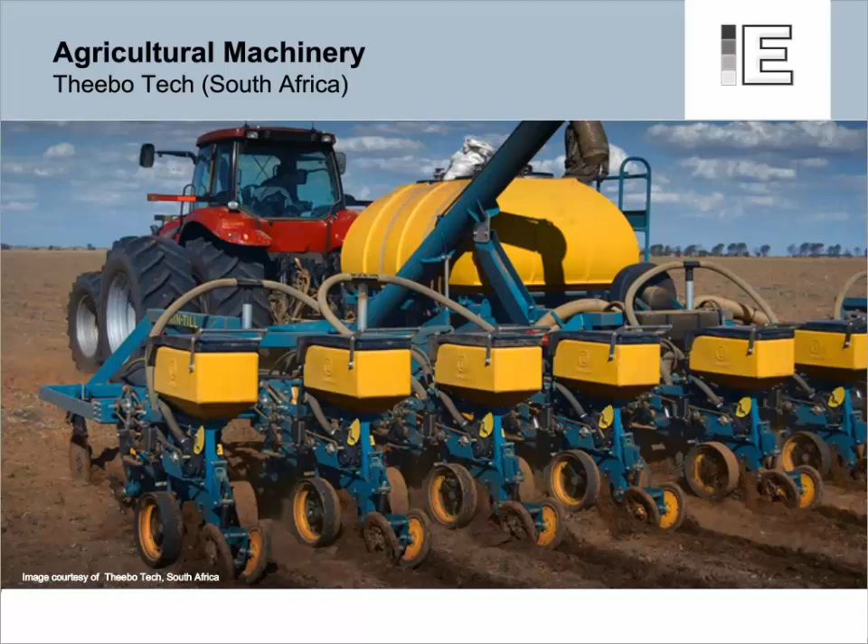Just like you and other agricultural machinery equipment manufacturers, including Theebo Tech, you design and build very complex machinery. These machines and projects are under a specific contract, and you have to deliver by a certain date. So what does that do to you? It puts product design on a very critical path for profitability.

If we take a look at the challenges that Theebo Tech faced, you can see them on the screen. They needed to streamline their entire process. They needed to select designs that could best manage sheet metal and large assemblies, and they also wanted to improve what they've already used and what they've already designed.

In order to maintain their leadership position, they were committed to finding a way to turn their challenges into opportunities. Theebo Tech took a deep look at their design, engineering process, and capabilities, and while they did that, they analyzed their strengths and their weaknesses. We'll come back to the Theebo Tech story in just a minute.

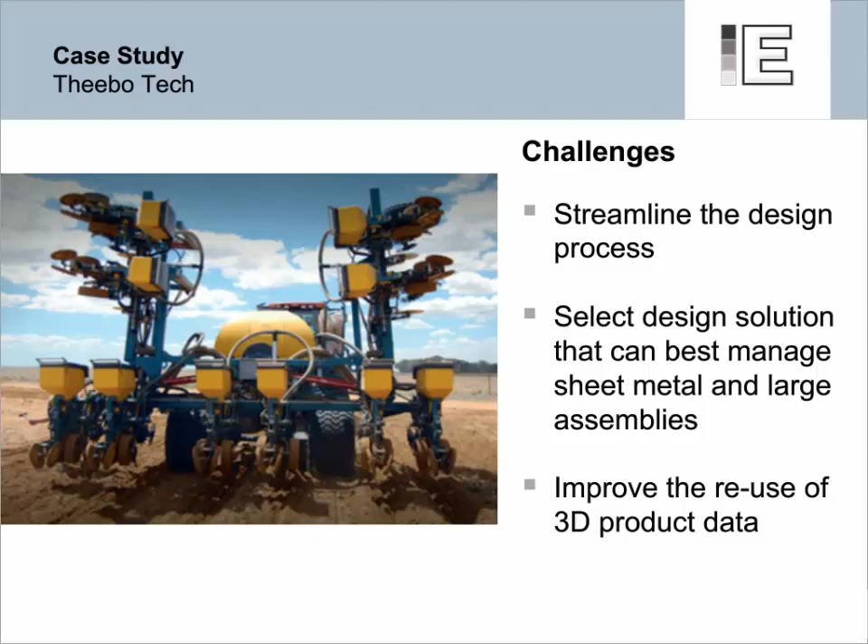But I want to step back a bit and look at the entire design to manufacture process for companies like yourself in the agricultural machinery equipment industry. To be competitive, Theebo Tech and manufacturers like yourself must adapt to be effective and have efficient order-to-manufacture and product development processes, right?

For manufacturers in this space, like Theebo Tech, what we've done is we've identified 12 key capabilities that drive success. These 12 capabilities cover everything from marketing to selling the product, to engineering them, to order planning, manufacturing and commissioning, and even servicing them.

As you take a moment and look at this framework, what areas of your company are thriving in? Where are your strengths? Where is it that you can improve? What we commonly see in many companies is they're pretty good in certain areas — that's why I ask, where are you thriving in? But others, they aspire to improve in other areas.

So Theebo Tech began looking at their current design CAD solution, which was outdated and very slow. For them, speed of mechanical design was their primary challenge. Now, mechanical CAD is just one of the supporting engineering software tools that can be used to improve your product development and design capabilities. This was the case for Theebo Tech, and every company is different. But here's what I want to ask you: what is your area to improve?

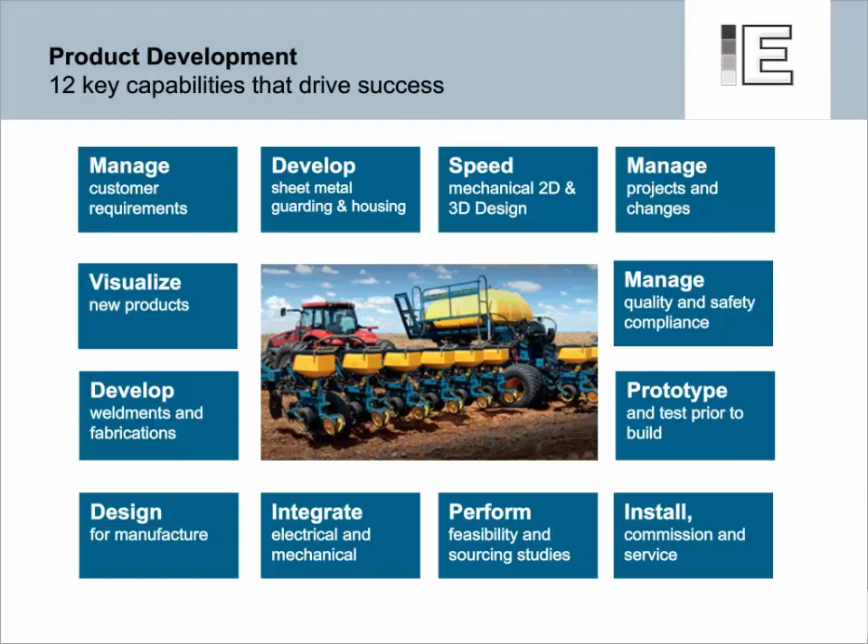So what Theebo Tech went and did is they looked at all the tools on the market, and they selected a tool called Solid Edge, which is a unique 3D design system by Siemens. For them, it turned out that Solid Edge was not only a great 3D CAD solution, but a complete 3D design and engineering package that brought new capabilities and technologies in areas like sheet metal, guarding, housing, product visualization for sales and marketing, as well as alignment of other customer needs with engineering.

All 12 capabilities are important to Theebo Tech. But what we're going to do now is dive into a deeper area for just 3 of them that are particularly important to agricultural machinery equipment manufacturers like yourself. We'll demonstrate why these capabilities are critical and talk about how to overcome challenges and get better in each area, and we're going to be using Solid Edge to illustrate some of these points.

As I asked you before, think about some areas. But what we want to focus on are the ones that, when we've talked to customers in this particular industry, stand out: visualization of new products, so they can get design information to their customers quicker and make it easier to see what the product will look like; the ability to perform feasibility and sourcing studies; and the speed of mechanical design. So let's take a look into each one of these.

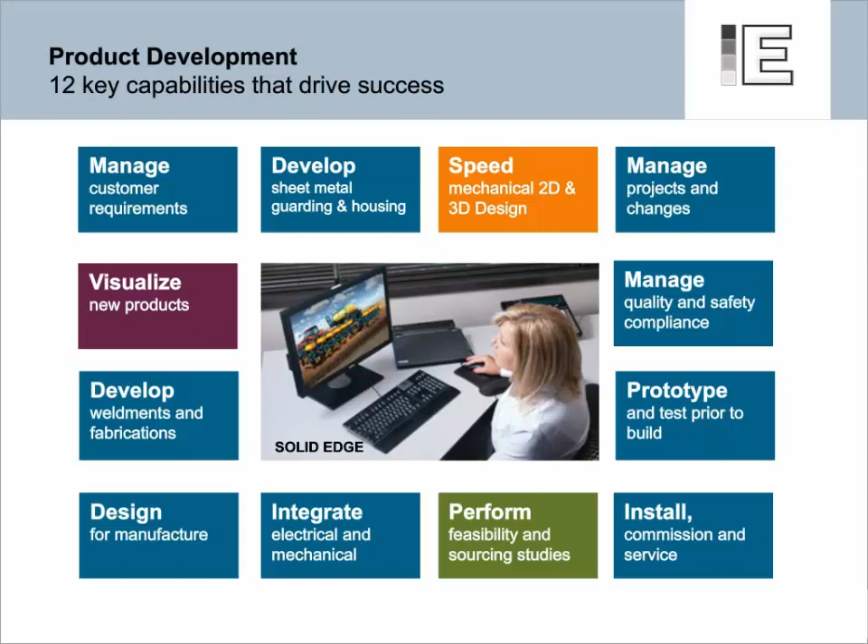The first challenge we're going to look at is the ability to visualize new products. Build-to-order equipment manufacturers want to improve the way they communicate a proposed machine before they actually go and manufacture it. And it's difficult to sell the physical machine if it doesn't exist.

So why not just take a picture? Well, if it doesn't exist, how can we take a picture of it? But to be competitive, sales staff and marketing can actually use engineering data in the form of renderings and animations so they can offer distinct, incorporating and innovative features and show off their advanced design technology

to their customers and what they can actually give them. Failure to truly convey visualization can lead to costly design iterations and, even worse, a lost sale. So to overcome these challenges, you need to provide fast, easy to create, and publish 3D photorealistic images and animations.

Solid Edge helps sales and marketing staffs provide rich 3D product information, which in turn helps improve your sales. Sales staff may present a movie file of a Solid Edge machine in motion, the machine in operation, provide exploded views, or interact with the virtual model on a smartphone or even a tablet. Solid Edge photorealistic renderings produce a virtual product picture and product walkthroughs.

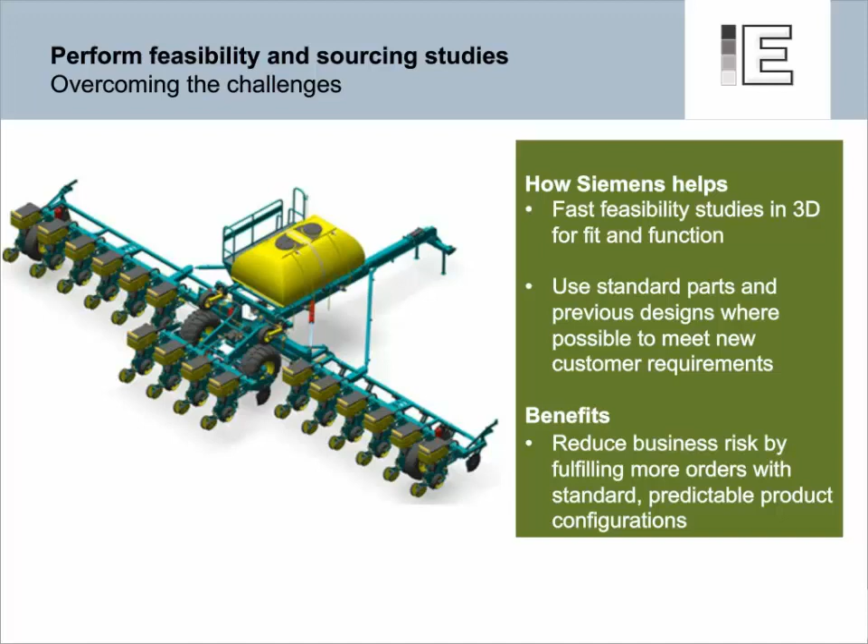So we've taken a look at two of the three. Let's take a look at the third key challenge for our customers. Many of them tell us that the creation of the 3D model is great for new business generation, but whenever you create the 3D model, the byproduct of that is a 2D working drawing or production drawing.

And that's used to manufacture the equipment. We all know and understand that if there's not a drawing, the part has a harder time being made.

But this is a common challenge for many companies because they end up using two different systems from 3D to 2D. With Solid Edge this is not a problem because we have an integrated 3D and 2D system built from the ground up to maximize this capability. And that's not always the case for other CAD out there.

But we recognize that most designers and engineers are under pressure to work faster and be more efficient. And with Solid Edge, designers and engineers have a complete system at their fingertips to help them design better.

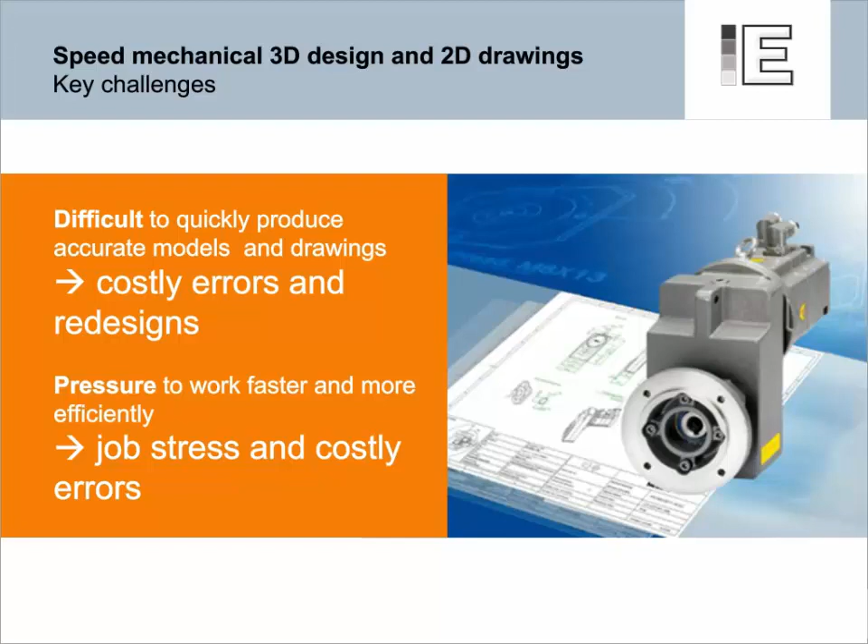To overcome these challenges, Solid Edge provides a complete and integrated software that makes the design process faster and more efficient. Engineers produce 3D CAD models and accurate 2D production drawings that can reduce design time and eliminate design errors before sending them out to manufacturing.

Engineers have told us that Solid Edge enables them to speed up their design, execute faster revisions, and provides better reuse of what they and others have done before. For the agricultural machinery equipment manufacturer, this means delivering sooner, invoicing earlier, lowering your business risk, and providing more opportunity to grow your revenue at a higher margin. Let's take a look at how Solid Edge can help your company gain a competitive advantage from accelerating your design.

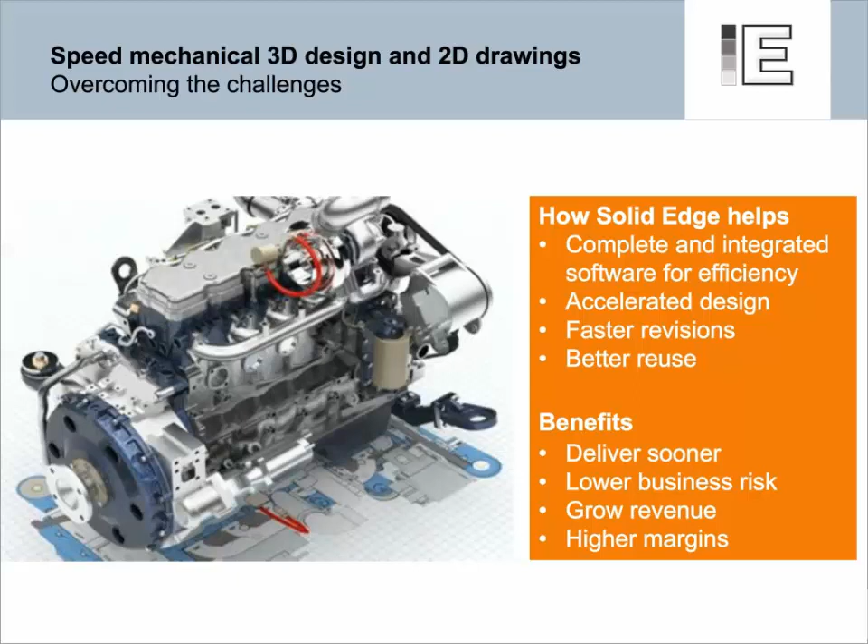I know you're probably saying to yourself, Kyle, I've heard this before from other people that their CAD system will help them design faster, and all you're doing is rewording it to 'accelerate your design.' What makes you different? Well, it's a great question, we get it all the time. But let me tell you what makes Solid Edge a unique product and tool to help you accelerate your design.

We've developed a technology inside of Solid Edge called synchronous technology. This technology is patented and only available from Siemens PLM. This innovation has dramatically changed the game in product development, because think about how you've been designing for the past 10, 15, 20 years. You've been designing in a history-based system, and there's nothing wrong with a history-based system except for one thing: whenever there's a change, how long does it actually take you to make that change?

What we've done is enable the user to have no pre-planning, meaning we've given them a tool so they don't have to think about what changes might take place down the road and design for that. With Solid Edge, we allow the user to focus on the design intent versus the design tool, so we don't waste your time trying to predict future changes like in a history-based system.

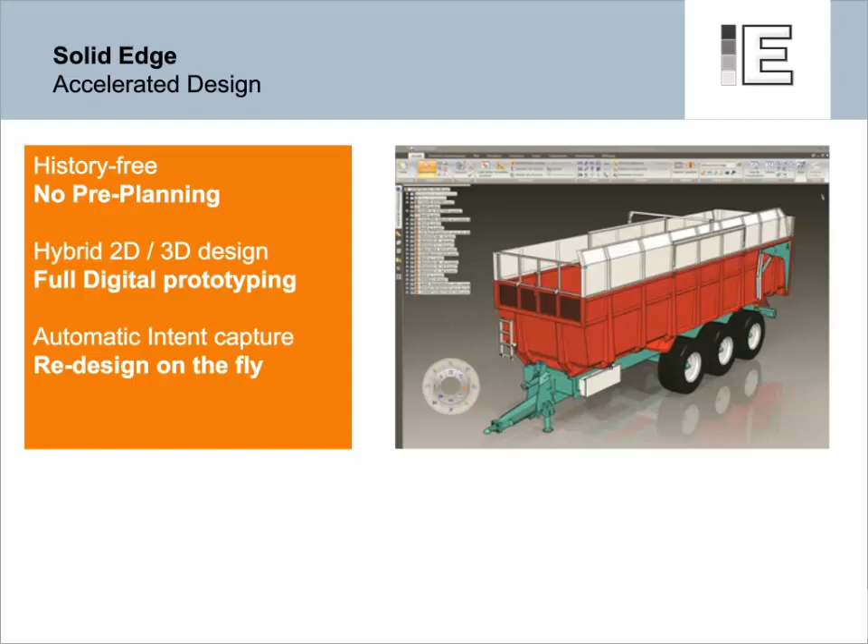In this fast-paced world of agricultural machinery design and manufacturing, winning new business and making profits on your projects literally hinges on the ability to respond quickly and efficiently to your customer demands. As we talked about before, Solid Edge with synchronous technology has the unique capability to allow your designers and engineers to make flexible changes to your designs and drawings in a constraint-free environment, regardless of who authored the source. Solid Edge does this by automatically interrogating the engineering model and presenting the user with possible design functions seamlessly, right at their fingertips.

This tool is called Design Intent. We named it that way on purpose because that is literally what it's doing. As you're modifying the model, it looks at the design intent of the model and presents you with those design intent options it finds on every single edit.

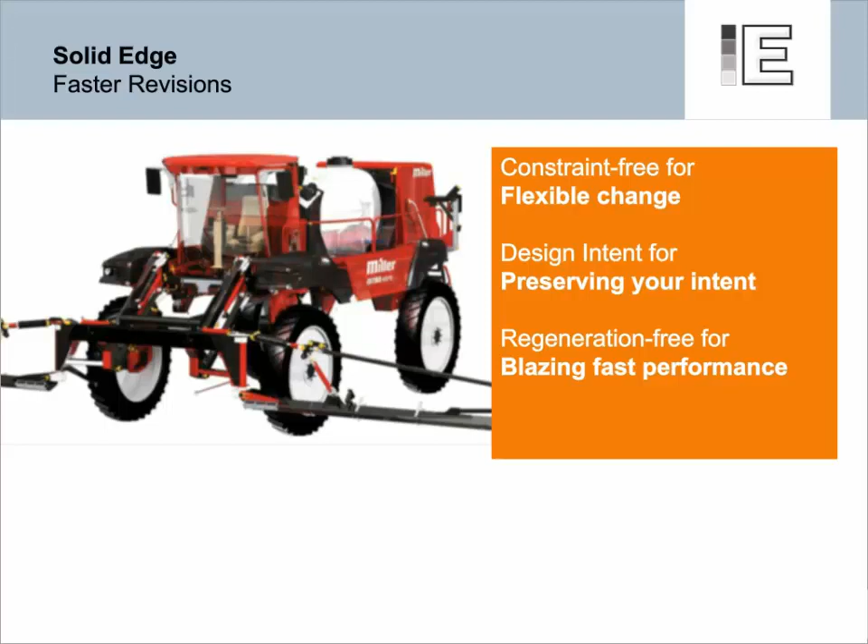Think of Design Intent as having an experienced co-pilot with you. As you fly along through your design and your changes, it helps you preserve that intent through the entire model. And the models don't need to be regenerated—what does that mean for you? That literally means blazing fast performance, and it means you have the ability to make your customer revisions in minutes instead of hours.

So for the agricultural machinery manufacturer, this means delivering sooner, invoicing earlier, and having lower business risks, as we talked about, and more opportunity to grow your revenue at higher margins, and also happier customers. Let's take a look at a quick video to learn more.

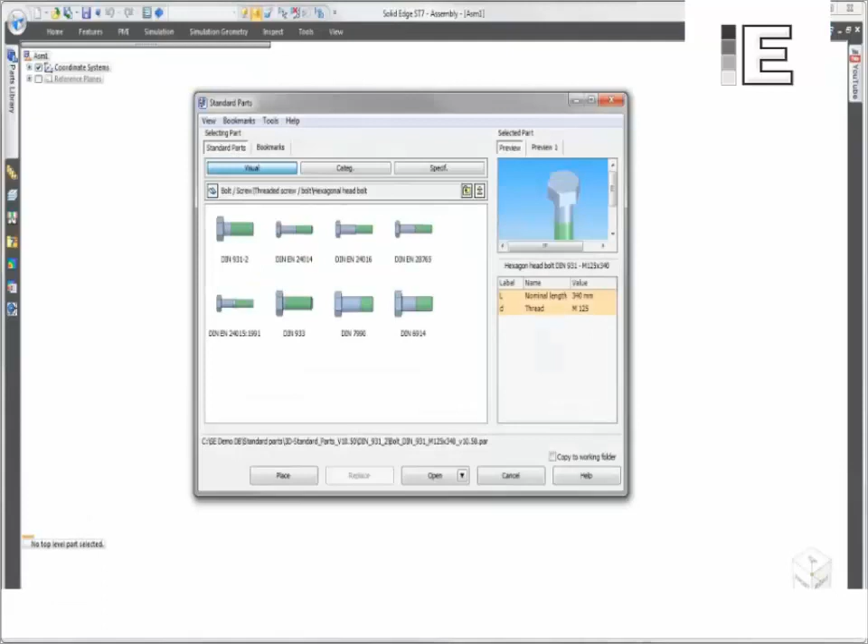Solid Edge delivers powerful but easy-to-use tools to effectively incorporate standard and catalog parts into any design. The integrated standard parts library, with the optional machinery library extension, is perfect for sourcing hardware or fasteners such as nuts, bolts, washers, and so forth. In addition, Solid Edge is equally adept at handling engineered off-the-shelf items. Watch as pre-built gears are installed to drive the wheel paddles of a commercial dough mixer.

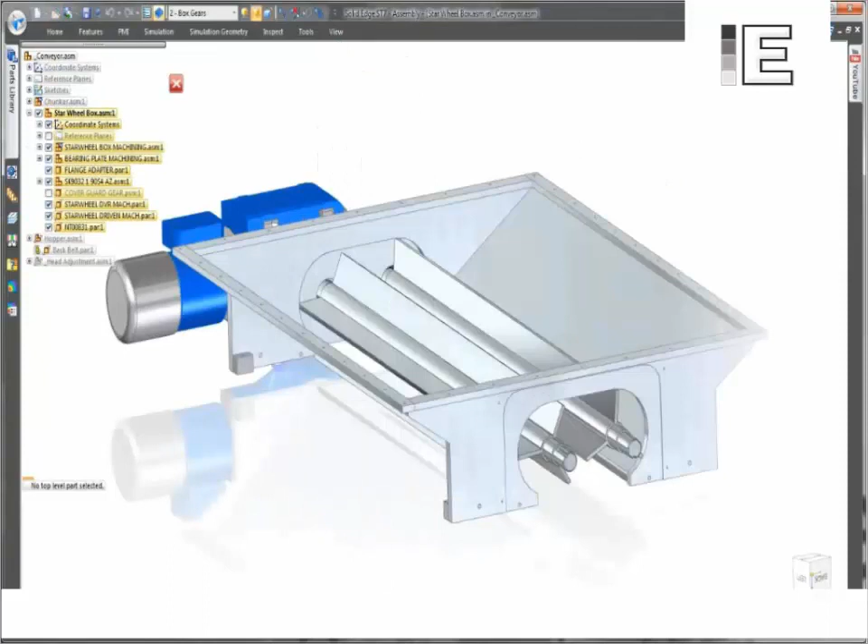The handy binder tool associates pertinent design, installation, and maintenance specifications to a specific assembly, and in this case allows a quick review of gear sprocket requirements.

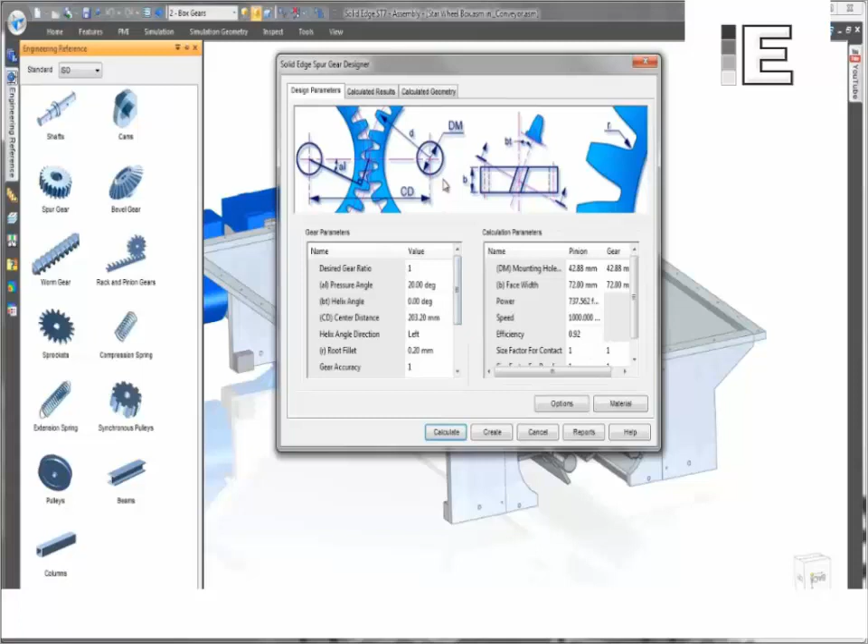The Solid Edge Engineering Reference offers a wide variety of ready-to-build engineered components such as gears, pulleys, shafts, and much more from a parameter-driven interface. Enter design requirements for the gear, and Engineering Reference will calculate, analyze, and report back on its mechanical and structural integrity, then place it into the assembly.

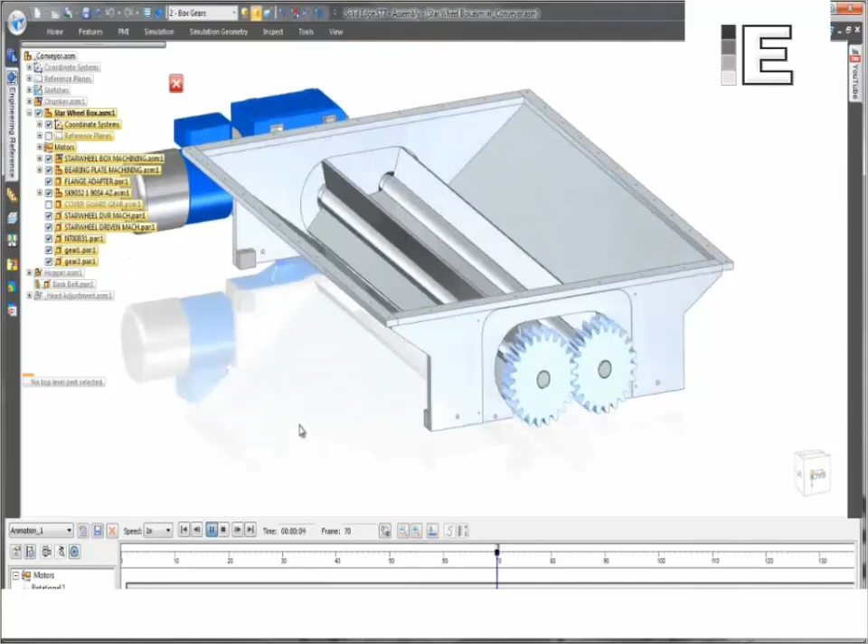The Solid Edge Assembly Toolkit provides positioning and real-world motion relationships that define a part's translational and rotational behaviors relative to other assembly components. In this case, watch as the positioned gear set uses a motor to simulate rotation of the mixer's paddles.

Incorporating outsourced components into a product design can introduce challenges, but Solid Edge easily addresses this by taking advantage of simple 2D sketches within a 3D modeling environment.

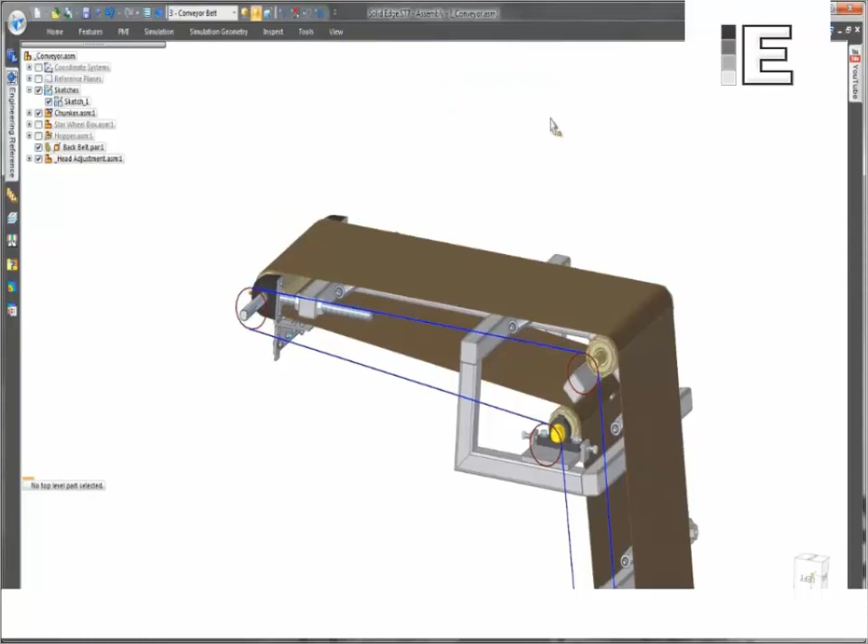This conveyor belt 2D sketch is used in combination with the variable table and the goal seek optimization tool to automatically compute the proper length of a purchased belt based on the configuration of the conveyor's support structure.

Supplier purchased or catalog parts can be quickly sourced from the Solid Edge Part Community. Part Community offers access to millions of Solid Edge files, searchable by supplier, description, shape, number, size, and more. Part Community can even match a purchasable part to a file you upload.

The integrated 3D viewer confirms the correct part, and Solid Edge's assembly tools make placement of the initial component easy as well as any duplicates.

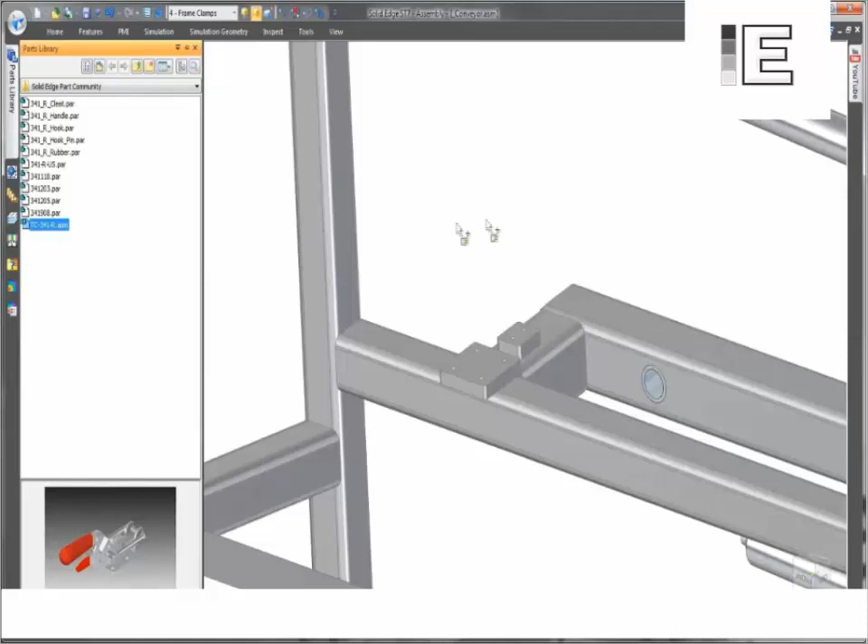Powerful tools making your job simple and fast. Standardization reduces design complexity, errors, and ultimately costs.

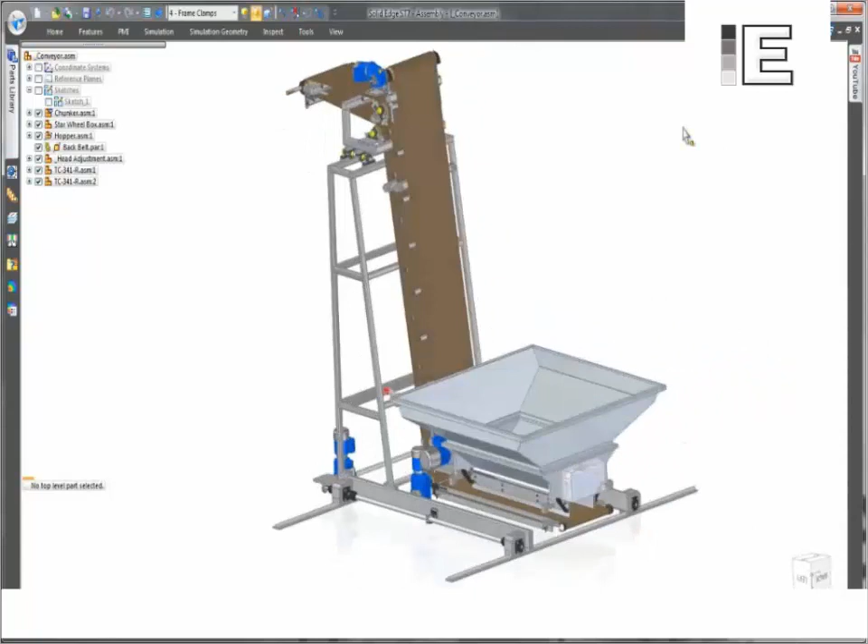Not only does Solid Edge deliver local and cloud-based libraries of pre-modeled standard and catalog parts, its smart and efficient tools help to accelerate your design. Solid Edge. Design better.

Now that we've gone through three of these capabilities and talked about accelerating your design, giving you faster revisions, and having better reuse of designs that you've already had before, I want you to take a moment and think about these twelve challenges and twelve capabilities. Again, we asked you before, where is it that you thrive in? Where is it that you're struggling in? And where is it that you would like to improve?

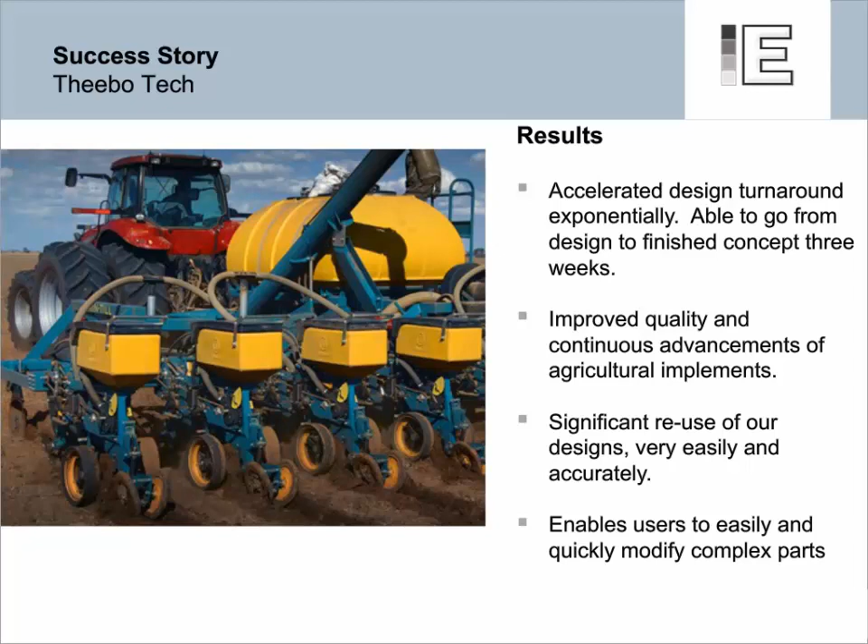So let's talk about another one of our customers in the agricultural machinery industry, and that's Miller out of Wisconsin, United States. They were challenged with having more sales growth, and they needed faster sales growth. And they needed to try to meet the needs of some of their larger OEM customers, like Case New Holland.

And they had numerous isolated software systems. There was manual data entry, which, as everyone knows, if you do stuff a little bit manually, then you're going to have inefficiency and you're going to have errors. It literally took them up to six months to update their parts catalog for any new design. And they needed to go to the next level.

What they chose is that they chose a PDM system from Siemens. Now, they already had Solid Edge, and Solid Edge was giving them great returns, but that PDM system from Siemens, called Teamcenter, gave them the ability to do that.

And with Solid Edge and Teamcenter, they have more and faster designs. They're able to meet their larger customer needs, right? And they're able to have accurate data and minimize those errors across the manufacturing process. And so that's why Miller selected Solid Edge.

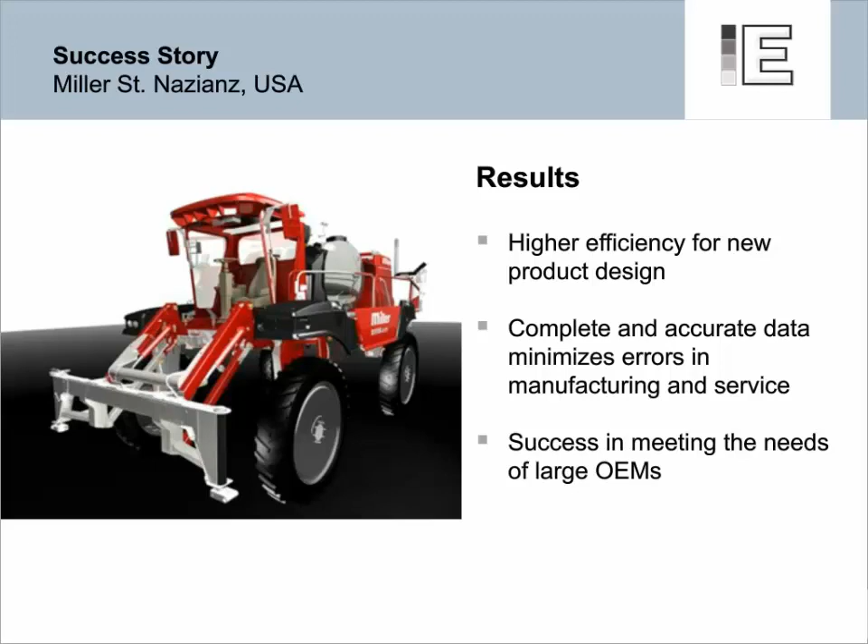And then there's Harsh International, a small Colorado-based company that manufactures a myriad of farm machinery and equipment. Some of those include dairy mixers, feedlot mixers, manure spreaders, rollers, flaker mills, and specialized weighing equipment, and many, many more that I could keep going on.

But as smaller family-owned farms start diminishing and large corporate operations become more the norm, so did the size of the equipment and the need for large, customized cattle feeders, mixers, and spreaders. Harsh International embraced innovation by adopting new technologies and inventing new agricultural machinery, and they did it all using Solid Edge.

Design times were slashed, productivity and profits soared. And so with Solid Edge, they were literally able to design better.

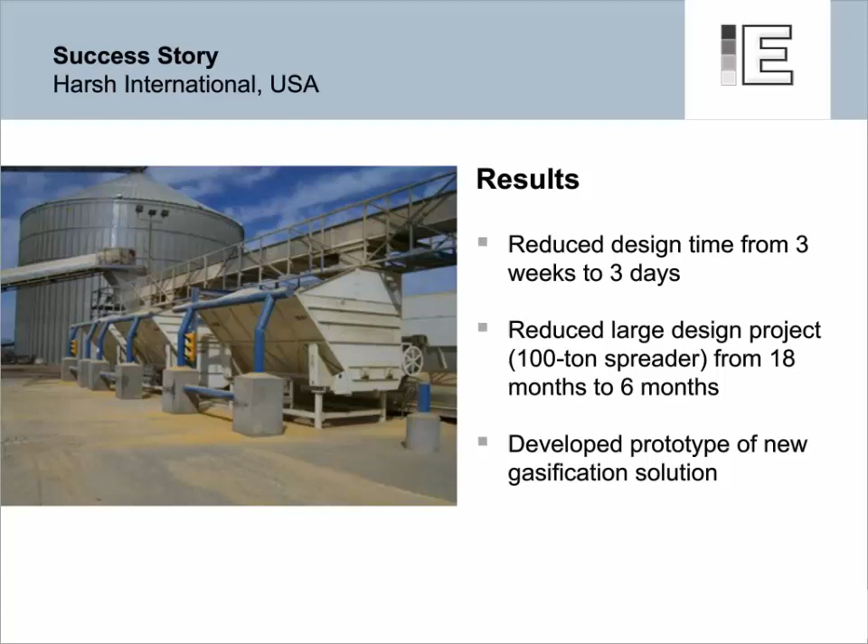One last success story that we want to talk about is from Lair. As a pioneer in aluminum coach work for more than 20 years, they've been able to leverage its skills from design through delivery to produce body work and farm stock trailers.

But they were challenged by competing with larger manufacturers. And they wanted to offer, and do offer, tailor-made products that include many options and variants that customers really need. And they need to also ensure compliance with industry and highway regulations.

And their key to success is Solid Edge. Solid Edge helped them improve their product development process, reduce their product cost, and allowed them to increase their in-house manufacturing from 50 to 65% of sales revenue.

And they were able to reduce their cost, and increase their order sizes. All this by switching to Solid Edge. And again, just like all of our other case studies, Solid Edge enabled them to design better.

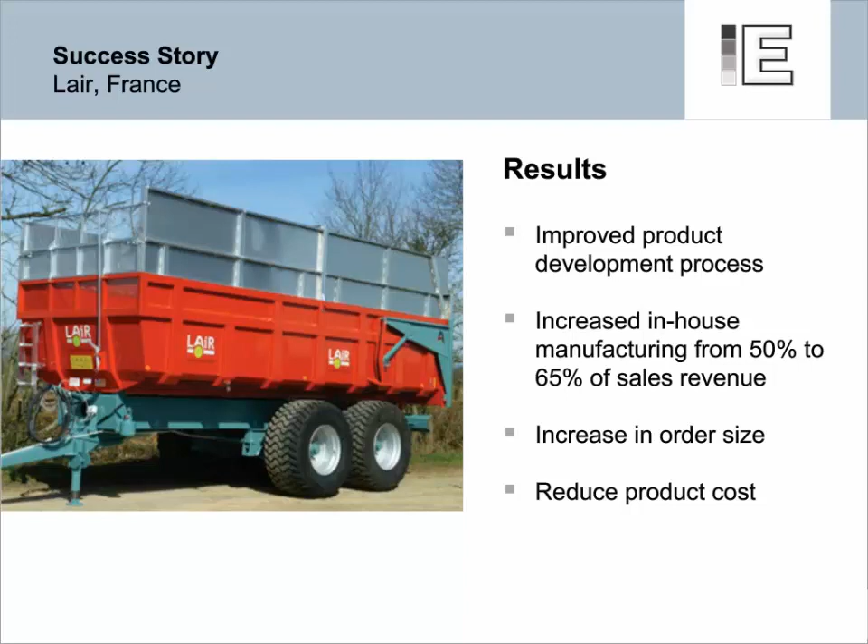So today we've shown you some of the best agricultural machinery equipment companies who have found a way to significantly improve their performance. They've leveraged advanced, innovative, and easy-to-use engineering software to improve their processes from sales to design to manufacturing. And as you can see, the results here, this is what our customers are telling us.

These are their results. And think about where you would like to be today. Would you like to have one of these results as one of your results? Is this where you strive to be in the future?

And so the customer success stories that we talked about are just a few. We have many, many more. And all the ones that we've talked about today and all the ones that we have are a testament to how they consistently achieve significant return on investment from designing their equipment by using Solid Edge.

And we have this tagline we'll talk about: Solid Edge, design better. And that's what we give and allow people to do, is literally design better, so that you can have a better product, get it out to market faster, and you can have more margin, more revenue, and more repeat business.

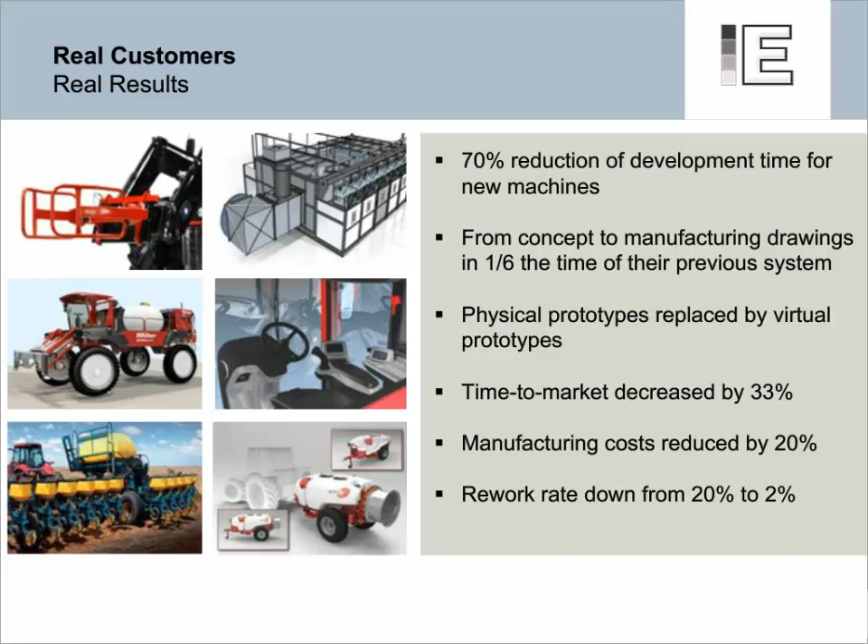So John, I want to throw it back to you. Today you've heard Solid Edge mentioned throughout, but we've not formally introduced it. Let's wrap up this session with a brief overview of Solid Edge.

Solid Edge is a complete 3D design and engineering solution that addresses the 12 key capabilities for the agricultural machine equipment industry. Solid Edge software is the most intuitive and productive product development platform for accelerating all aspects of product creation, including 3D design, simulation, manufacturing, and design management.

Solid Edge for 3D parts and assembly design, using synchronous technology, accelerates equipment design, speeds revisions, and improves the reuse of previous designs.

Solid Edge simulation for digital validation of critical components, reducing the need to create physical prototypes and lowering material and testing costs, as well as improving reliability.

Solid Edge manufacturing for definition of accurate machining, fabrication, and assembly processes, and improves the overall manufacturing efficiency.

Solid Edge design management improves the overall efficiency of equipment design projects and ensures that accurate product data, specifications, and requirement documents are available to all. And...

A growing app ecosystem: Solid Edge apps extend the capabilities of Solid Edge to provide a complete ecosystem for product development and manufacturing that meets the needs of today's agricultural equipment manufacturing organizations. There's a vast array of applications from process plant design to tools and utilities for rapid, high-quality product development and functionalities related to design and engineering.